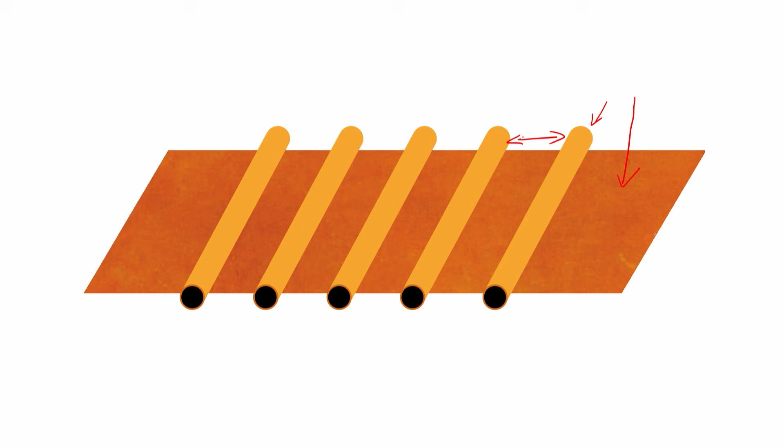So this is a flat plate collector designed for picking up heat into the water. It is basically a water heater, so it will have pipes as the conduit through which the water will flow. This is how those parts come together, and we would have an arrangement where incoming water is available, and hot water can be tapped from the tube on top, while the arrangement in the middle does the heating of the water through the pipes.

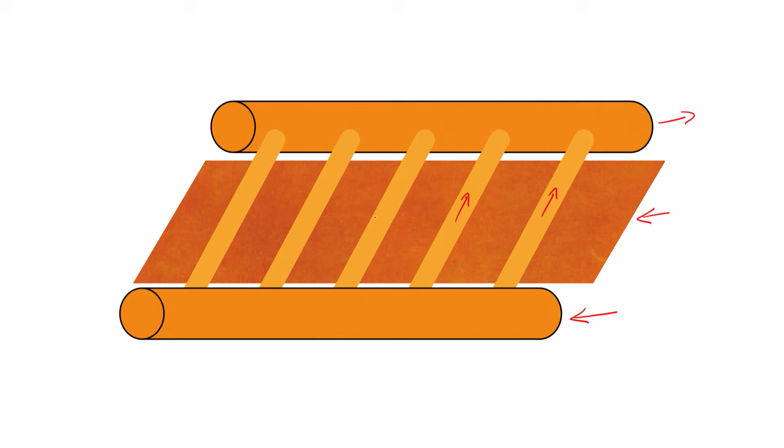If you incline it such that the top side is inclined upwards, then the water flows in the direction shown by these arrows, simply because hot water will start moving upwards and cold water remains at the bottom. In this process you get hot water collecting at the top, and then take it away to a reservoir of some sort.

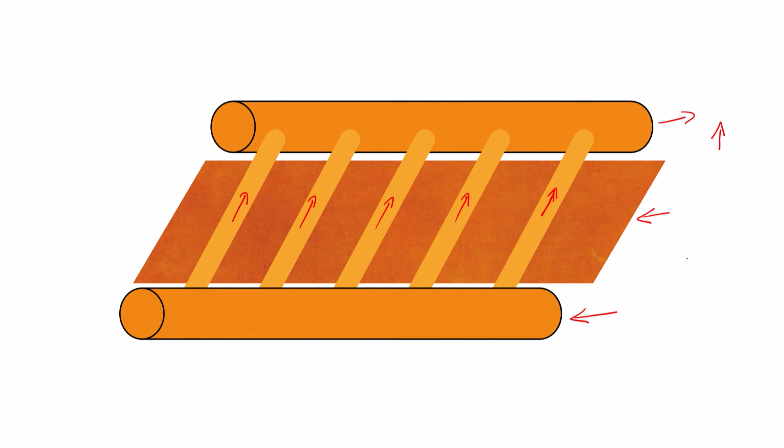This is shown as a schematic here in copper color, but you would actually need to make it black so that the energy is absorbed completely and not reflected away from this surface. The same schematic is shown in grey here just for ease of observation, but in principle it would be black in color.

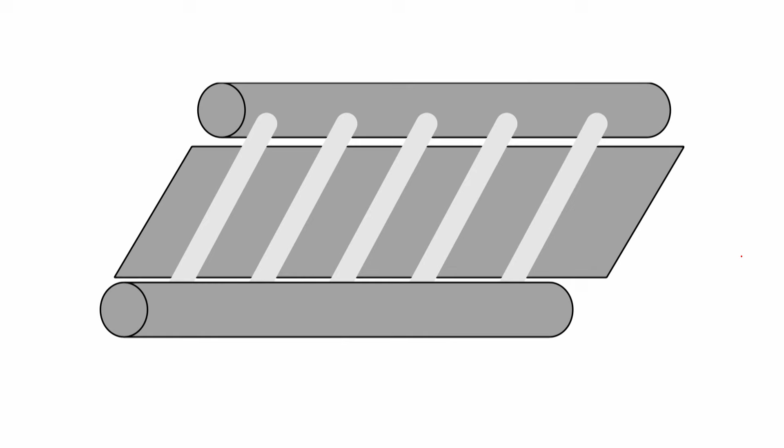In addition to this complete setup, we would also need a glass plate on top, which is what I have added in this schematic. All the rest of it is the same as before, except that to prevent loss of heat through infrared radiation from this flat plate collector, we place a glass sheet on top.

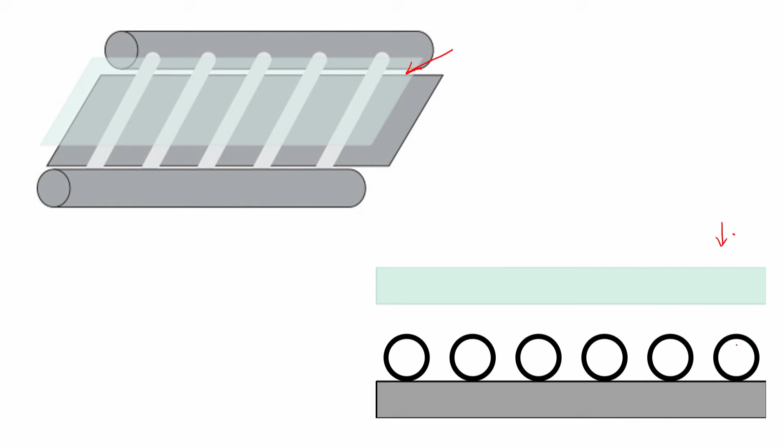A cross sectional view of this is shown in the figure below. Basically, it shows an arrangement as follows: these would be your copper pipes, black colored, and this is your copper plate. The incoming radiation will have visible, ultraviolet, as well as infrared. So from high frequency, that would be ultraviolet, then visible, then infrared, arriving at this surface.

Because this is glass, the infrared will not enter this surface, it will just get reflected away, but visible and UV will go in, and heat up the tubes and the water inside.

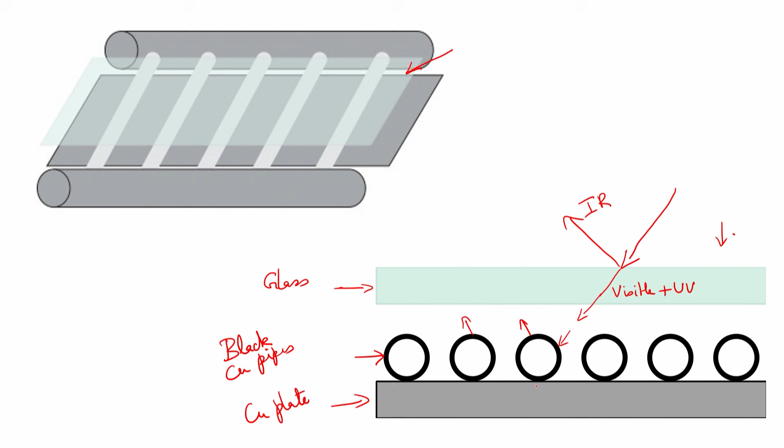Once this heating is completed, or as the heating proceeds, as the temperature of the copper pipes and the copper plate increases, it will try to radiate out infrared, because at that temperature, say 60-70 degrees C, much of the energy that leaves this system in the form of radiation leaves as infrared. But since glass is non-transparent to infrared, it just bounces right back, and therefore the energy captured is not lost. That is the reason why we place this glass plate on top.

The glass plate also takes care of preventing convective losses. Whatever air you have flowing on top is unable to access the copper pipes, and therefore does not take heat away in the form of convection from the pipes below.

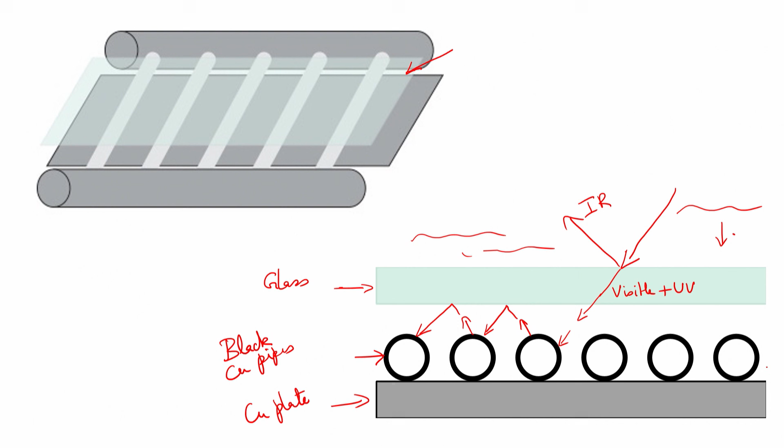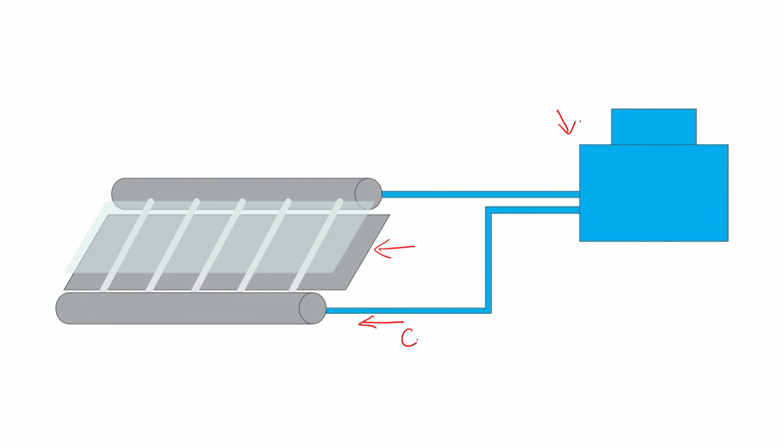As an assembled setup, it would look something like this. You would have the flat plate collector here, consisting of the copper plate, the copper tubes, the glass plate on top, as well as the supply and discharge tubes, and it would be attached to the tank you see here. Cold water is accessed by the pipe at the bottom, and hot water is available at the top. This hot water goes into the reservoir, and eventually the water in the reservoir keeps getting hotter and hotter. So this is the basic idea.

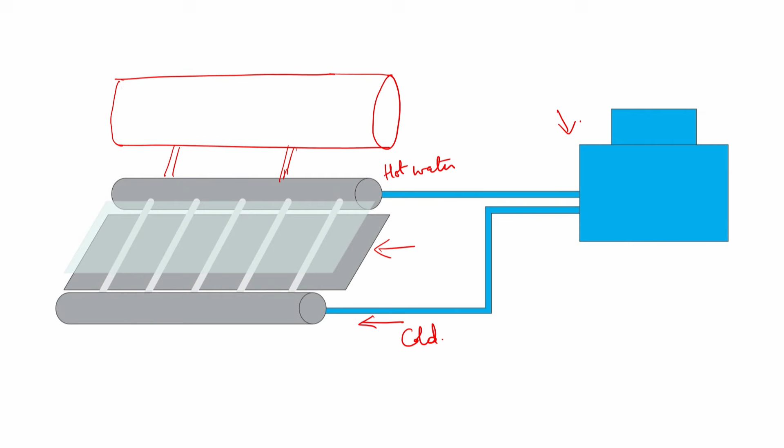I am going to talk of a couple more things here. One is what needs to be done with respect to orientation of this unit, and also what needs to be done to extend this idea to capture heat for the purpose of heating air. So those are the two things we are going to discuss.

We will now look at how we need to orient this unit so that we capture the sunlight effectively. To do that, we need to consider the orientation with respect to the seasons, and also with respect to the time of the day.

Generally, for a flat plate collector, we are not so worried about the time of day because it is basically flat, so we do not necessarily track it hour by hour with respect to the position of the sun. For example, for me this is due east, I have due east out there,

and this would be due north for me, and that would be due south for me. So generally we do not keep this pointing towards east in the morning and keep tracking the sun through the day. You can do it, it is not particularly necessary. It is much more important that we track the seasons, so to speak.

As I said, this is due north for me, and that is south, the way I am presently oriented. For us sitting in the northern hemisphere, the sun is typically in the winter months towards the southern side. That is the arc it does through the southern part during the winter parts of our seasons, and then as summer comes, this slowly becomes more vertical, and the sun moves from east to west more or less directly above us.

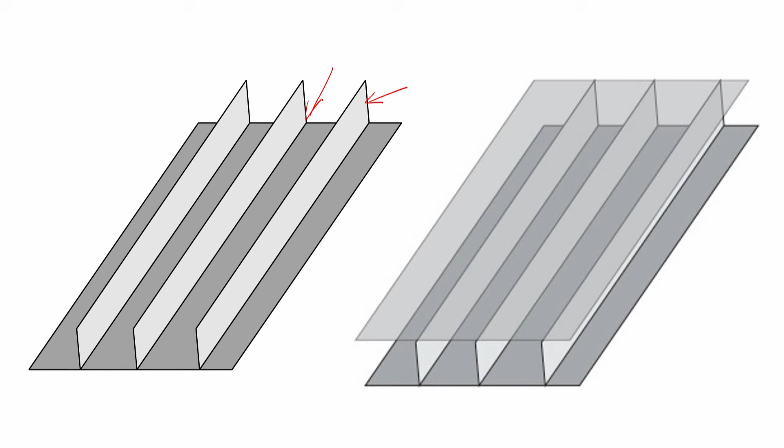We looked at how a flat plate collector can be used for heating water; this is an implementation of how it would be used for heating air. The main difference is that previously we had pipes, now we have fins, which are vertical sheets of copper placed as shown in the figure, increasing the area of contact between the flowing air and the fins.

The air and fins have much higher surface area of contact relative to air simply flowing through a pipe, resulting in much better heat transfer from this hot flat plate collector to the air above it. You can see in the implementation that there is a glass plate on top, serving the same purpose as before: it prevents IR losses and convective losses from the plate. Both radiation and convective losses are prevented using the glass plate, and this implementation is able to heat air.

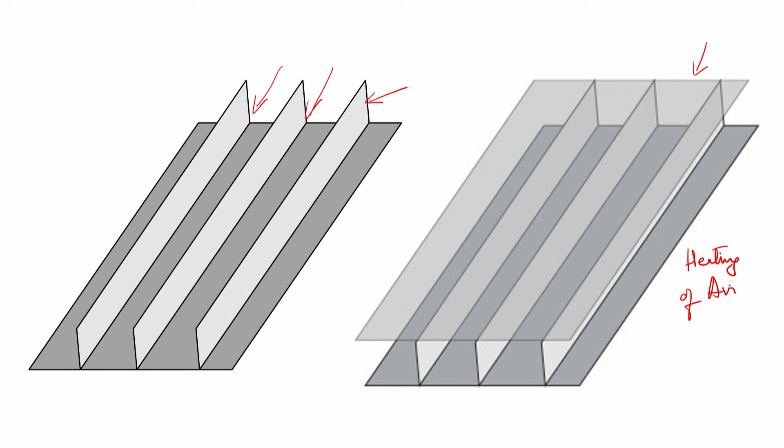One other major challenge in this unit is how you would store the heat. Normally with water, you just have an insulated water tank holding the hot water. You need an analogous situation for hot air. What is typically done is you have something like a tank, but filled with pebbles of different sizes, an otherwise empty tank, and you have hot air flow through that tank.

When the hot air passes through, those pebbles pick up the heat since they have good thermal mass, so they pick up and hold the heat. You have a box full of pebbles holding the heat inside them, so later, after hours, or in the evening when the sun is not as hot, you still want to use the heat - the air flows through those pebbles, picks up the heat from there, and is used for whatever application is intended. That combination is typically used to heat air using a flat plate collector.

There is one final modification: although I spoke about fins, and told you that you can put three fins here, that is clearly still a limited implementation with just three fins. If you want to greatly increase the area through which heat transfer occurs, ideally you want this area filled with something porous, which would then take the heat. Usually what we do is have something like a box filled with iron filings.

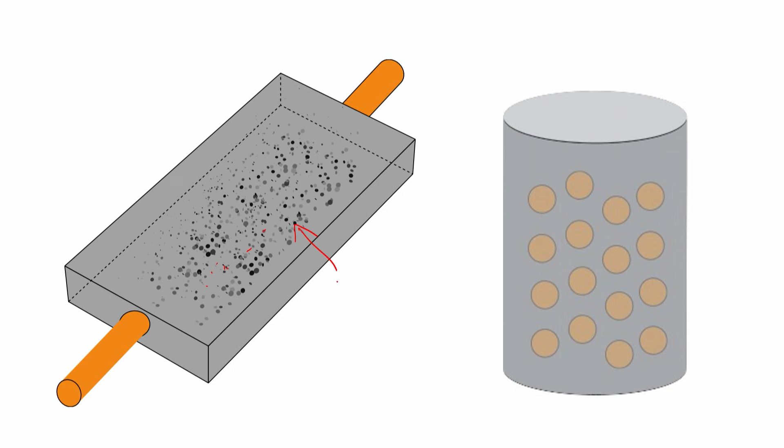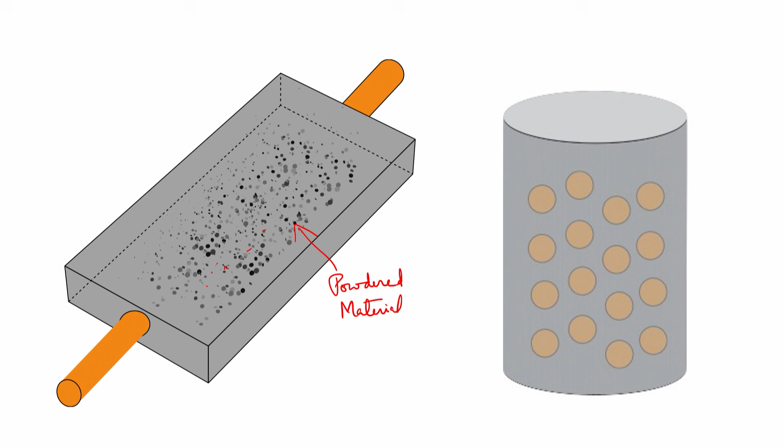This is typically metal filings of different forms, available even as industrial waste, placed within this box. Air enters the box from one side and comes out the other side, but while inside, it travels through the box in various different routes, finding its way through and coming out the other side.

In this process it picks up all the heat available inside that box, which has been heated through solar radiation. It is a copper box, at least the base is copper, and the top surface is glass. The copper base has been blackened, and there are metal filings present which pick up the heat and transfer it to the air that is forced through them using a blower.

The air that comes out can be directly used for some industrial application, but if you want to store that heat to use when the sun is not at its peak, you use a container that contains pebbles, and this air is fed into this container, finding its way through it.

You can have an inlet here and an exit here, and use this air for any other purpose, but in the process of traveling through this container, it heats up all these pebbles, which then store heat. So off peak hours or later in the night, if you want hot air, you simply send cold air into this container, and it will pick up the heat from the pebbles and be available as hot air at the exit for use.